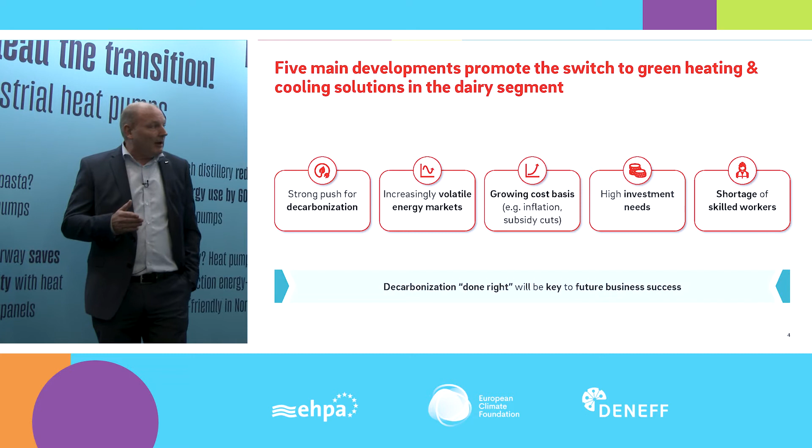These are the 5 main developments we are going to promote. It's a strong push for decarbonization we see in the market. Everyone is asking us, how can we do this, especially under the ongoing threat we see in the current energy price development. We see very volatile energy markets, especially in power generation. Of course, we are phasing out large-scale power plants in the near future in most European countries and we have to renew the power, and how can we solve this?

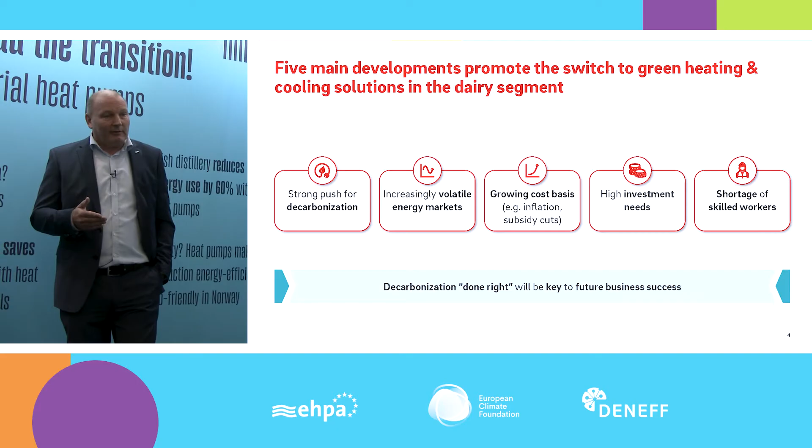We see the high investment needs in these projects as well. And a very, very crucial topic is the shortage of skilled workers we have. We have to implement these projects. And as you see, for instance, we are going to invest more than 43 billion euros in the next 4 years as E.ON Group in grids and projects across Europe.

But we need really good and many skilled workers to realize all these projects, because here we really see a shortage in the markets. So the decarbonization done right will be, of course, for our clients as well as for us, a very big piece of the future business. And therefore, we really need to develop our solutions jointly with our customers.

Next slide, please. We always build together dedicated projects. We do not take any project off the shelf. Every project is unique in our development, and that's the very core of the business we are doing.

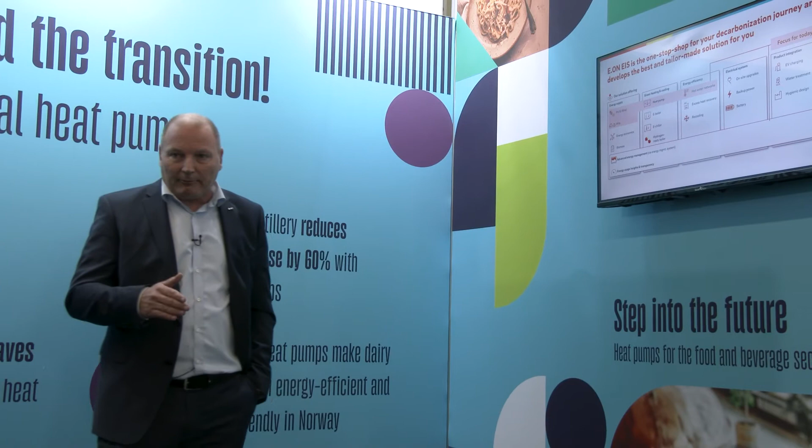So what we are focusing on here is heat pumps, and we will later talk about high temperature heat pumps, because heat pumps as a mass product are not meant here. It's really the industrial design of heat pumps for high temperature processes. And this is, from our perspective, also the key driver in the future we need to tackle.

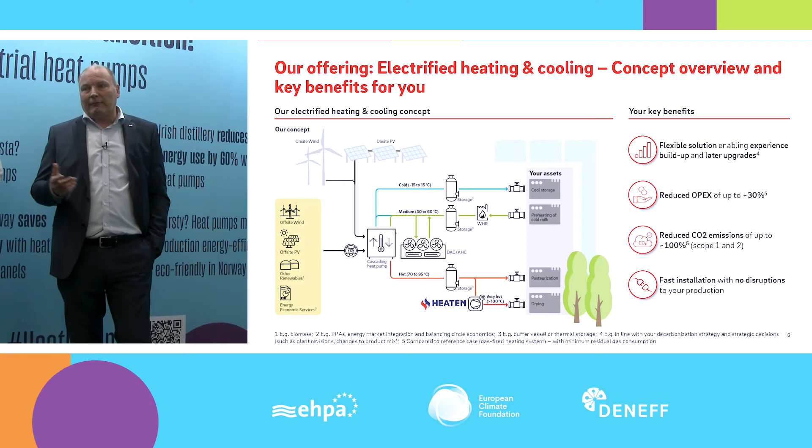So next slide, please. Here I've shown a typical solution of the future we see. So of course we need a large portion of renewable energies in the future. That means either on-site or mostly off-site, we need to generate green power. Green power can come from wind, solar fields, biogas, biomass solutions as well, and other sources in the future like hydrogen. But as long as we do not have a really mature market to replace natural gas by hydrogen, we really need to find other solutions, integrating PV and wind assets into the decarbonization roadmap we see on our client base.

So if you then deliver the power on site, we want to install large-scale heat pumps using waste heat potentials from customer sources on site, from production processes, from cooling processes, for instance, or other environmental heat sources like rivers, and then boost this up in a big heat pump to go to green heat. So we see here a dairy process where we can do this. We can do it for cool storage. We can do preheating of the cold milk, the pasteurization process and the drying process in the future via heat pumps. These are the core elements we are going to identify.

But what is key in all of these projects is really you have to look into the existing infrastructure on the premises of the client and what needs to be optimized there to run the heat pump in the most efficient way. Otherwise, the heat pump does not make sense if the system behind, the secondary system, is not really adapted to the heat pump. So this is a crucial part of the whole project, but there we go with our engineers into the field, look into the details at the client sites, and make a proposal.

And what are the key benefits? You can reduce your OPEX. If you go for such a solution, you are pretty flexible with regard to power and cooling generation, on the same page with heat pumps as well. You can reduce your carbon emissions by 100% with green electricity running a heat pump, and you have a fast installation without big disruptions of the processes on your end. So this is a very high advantage of heat pump systems.

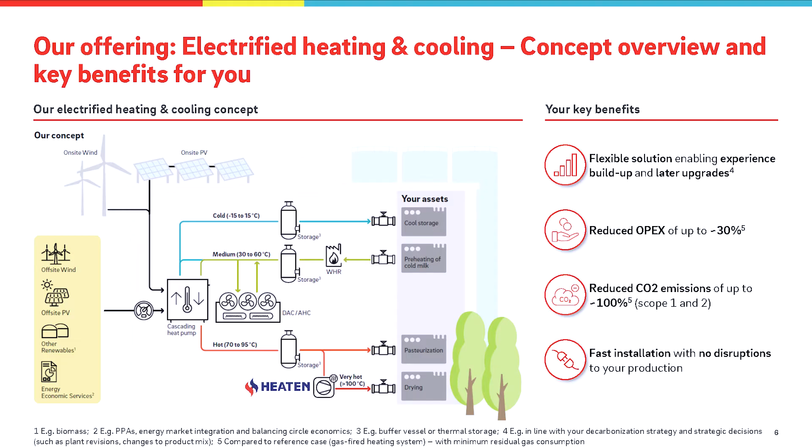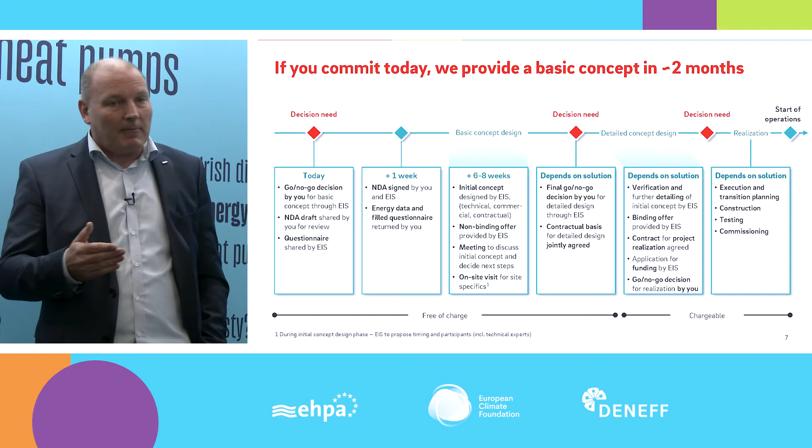Next slide, please. Yes, this is a typical process of how we go into such projects. So first of all, we get in touch with you and make the first presentation of what a solution could look like. If you're interested, we sign an NDA together to exchange some data and information that is needed to run our simulations. What might be the best concept? Within 6 to 8 weeks, we make a first initial concept for such a project, and then we discuss it jointly with our clients, whether this is the right way forward, where it might need to be fine-tuned, and how we can then come to the final project setup.

And afterwards, when the decision is taken, we really go on to the next steps and develop the project until the end, into the contract, into the realization phase, where we take responsibility for the execution and the transition planning, the testing, commissioning, and all stuff like that before we hand it over to our clients.

And this is a typical way forward in our projects. And at the moment, we are running a lot of those projects across Europe. And you are sitting here in one of these buildings where we are also going to install a multi-megawatt heat pump to produce cooling and heating. So this is a very interesting project, and we are also proud of being part of the project as well.

So from our belief, heat pumps are really the core technology for the future to decarbonize the industry. And we are happy to support. And now I would like to hand over to André from Heaten.

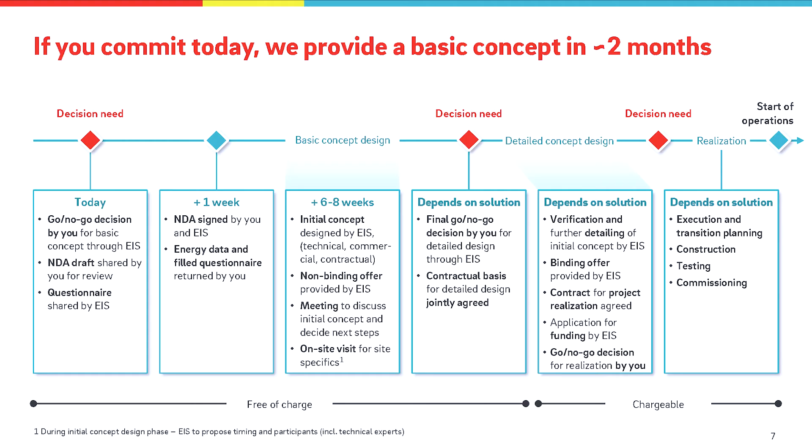Thank you, Christoph, for the nice introduction. My name is André Bechem. I'm the head of sales of Heaten. And now a few words about Heaten. So I think all of you are familiar with E.ON, but I think not everyone has heard about Heaten.

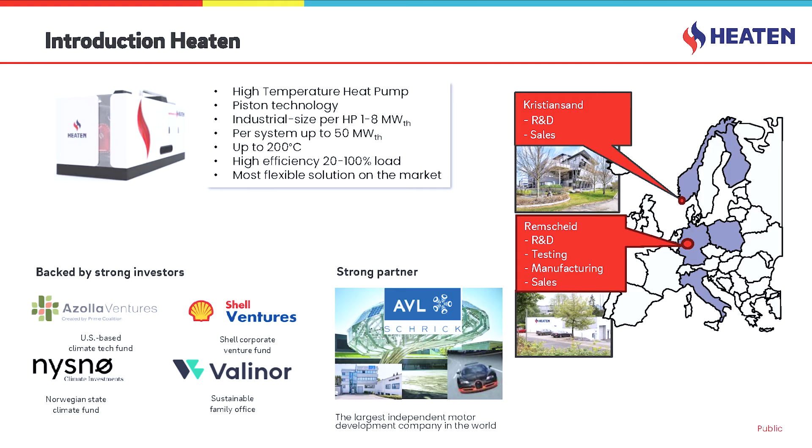Heaten has developed and produces and sells high-temperature heat pumps. It's a piston-based technology, with an industrial size of 1 to 8 megawatt per heat pump. We can reach up to 50 megawatt per system if we install it in parallel or in a cascade. And we can reach temperatures up to 200 degrees. And due to the piston-based technology, we have a very high efficiency over a broad operating range of between 20 and 100% load. And due to this, we are the most flexible solution on the market in this megawatt range.

Currently, we have our head office in Kristiansand in the south of Norway, where we have our R&D and sales. In Remscheid, just 35 minutes from here, we have also our R&D department. We have the test bed and the testing, the manufacturing and the sales.

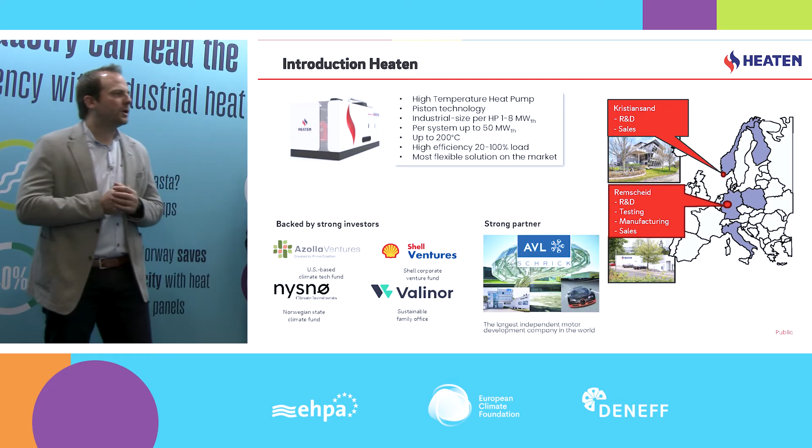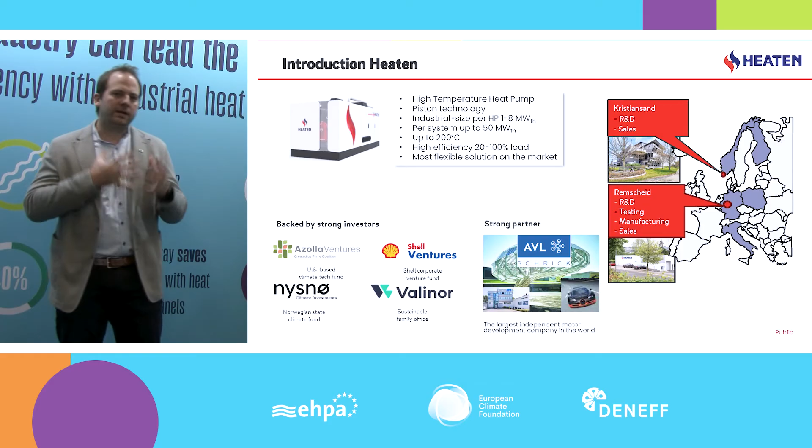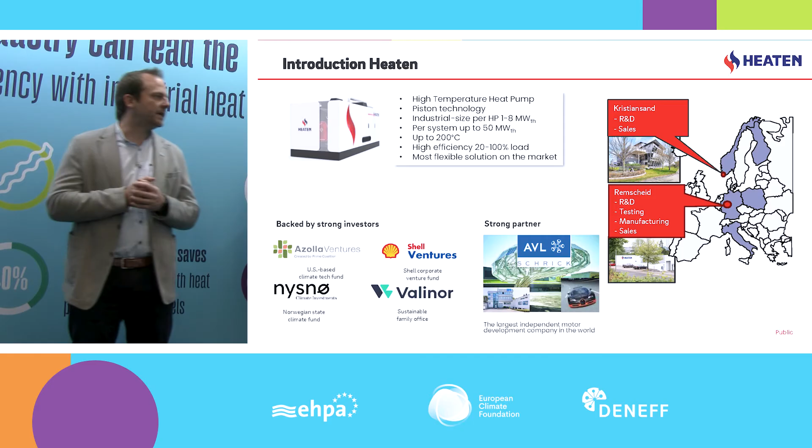We are supported in the development by a very strong partner, AVL. AVL is the largest independent powertrain developer worldwide, and they are the expert when it comes to piston-based engine and compressor development. And we are also backed by very strong investors. We have Azolla Ventures, Shell Ventures, Nysnø, the Norwegian State Climate Fund, and Valinor behind us.

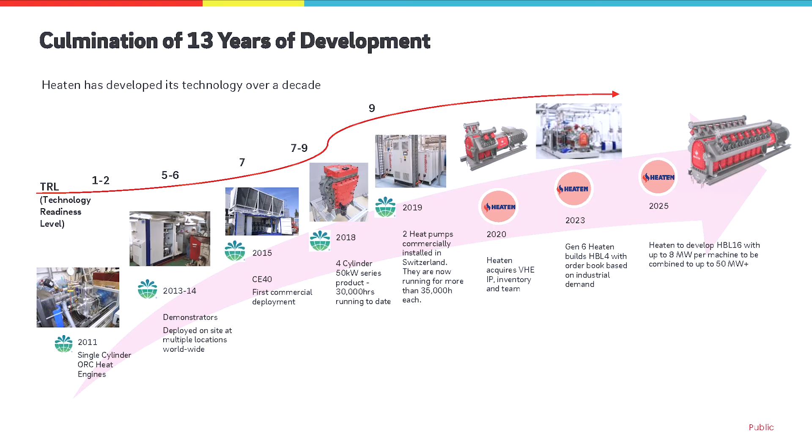Next slide. Looking a little bit to the history, where we are coming from. So everything started in 2011 with an ORC-based system, so converting thermal power into electricity. The key know-how and knowledge about lubrication, the high temperature working fluids and all this stuff was already gained here. And then in 2017, the idea was born to make the process reverse. So in 2018, the first prototypes. In 2019, the first commercially available heat pumps were installed in the field.

However, these machines worked great from the technology point of view, but they can only deliver 200 kilowatt each. And especially from the food industry, we sometimes got the feedback that this was a kitchen machine from the sizing. So now the logical next step was to make it much bigger. So we increased the displacement per cylinder by a factor of 8. And in 2023, we had the first HBL4, so heat booster large series 4-cylinder, on the test bed in Remscheid.

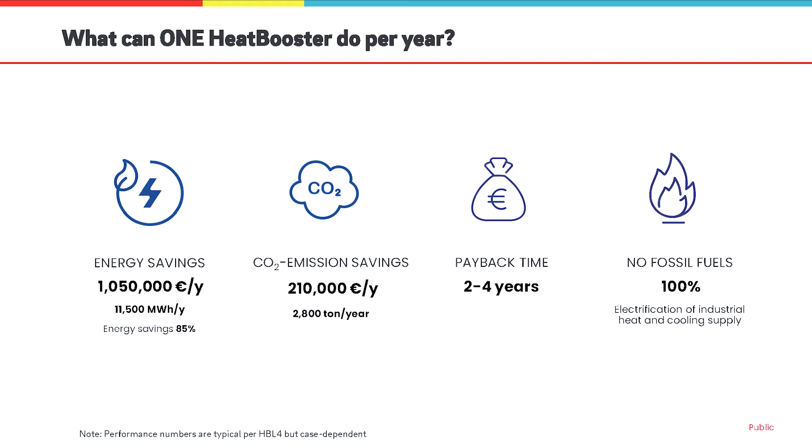Next slide, please. What can one 4-cylinder heat booster do for you? It saves a lot of energy, so up to 1 million euros per year, depending on the case. A lot of CO2 emissions, so up to 2,800 tons per year. We have typical payback times between 2 and 4 years, of course case depending on the country, and you get independent from fossil fuel. And in addition, depending on the case, you can also save a lot of water because you can get rid of the cooling towers.

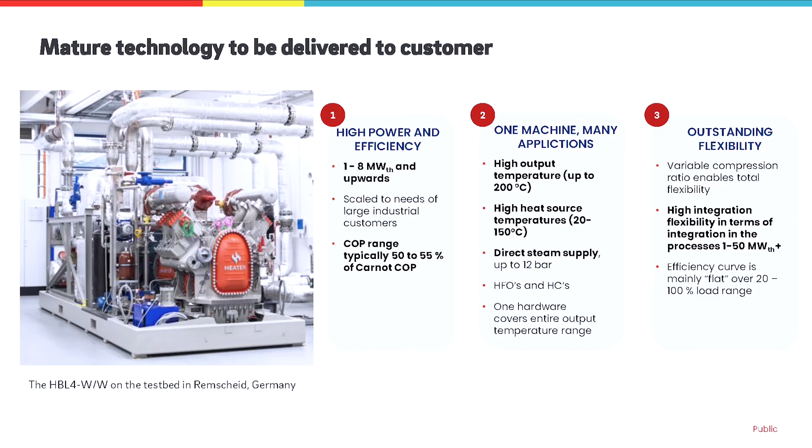And as mentioned in the beginning, we have a variable frequency drive on it, so the efficiency curve is almost flat between 20 and 100% of the load. We have the 4-cylinder. This can make, depending on the temperature lift, up to 2 megawatt. If we install several of them, we can reach 5, 6, 7 megawatt. If it's more than, let's say, 6, 7, 8 megawatt, we would use the V16.

The V16 is basically the same as the V4, but has 4 times the cylinders. And with the V16, we reach a theoretical volume flow of almost 6,000 cubic meters per hour, and that's by far the biggest piston-based machine on the market. If we install several of these HBL16s on a location, we can reach up to 50 megawatt.

And based on our experience, a lot of food requests are in the range between 1.5 and 30 megawatt, and in saturated steam, the majority of requests are typically between 120 and 180 degrees. And the important thing to mention here is that you can do a pilot, a proof of concept, proof of technology with 1 megawatt, and then later on you can scale it up to 20,

30 megawatts. So you are also flexible in how you integrate the machine, because in our experience, a lot of especially food customers' factories are historically driven, so space is always an issue. Also how to bring in new technology, and we can do it step by step.

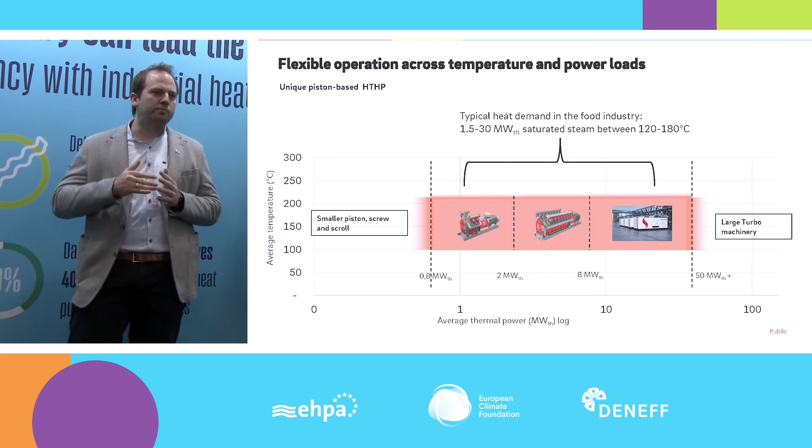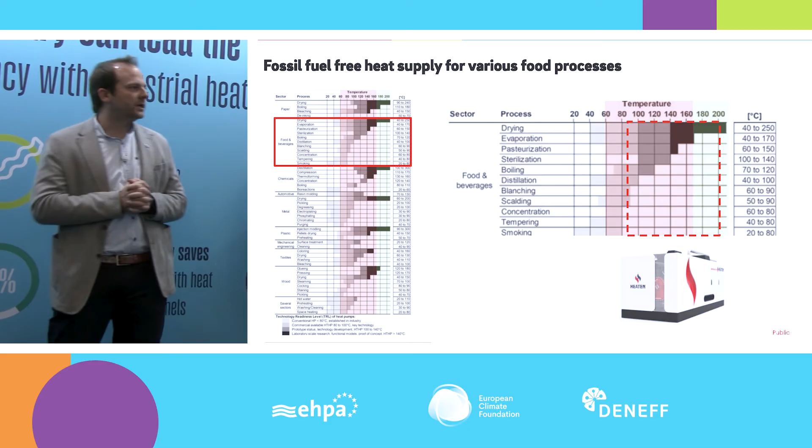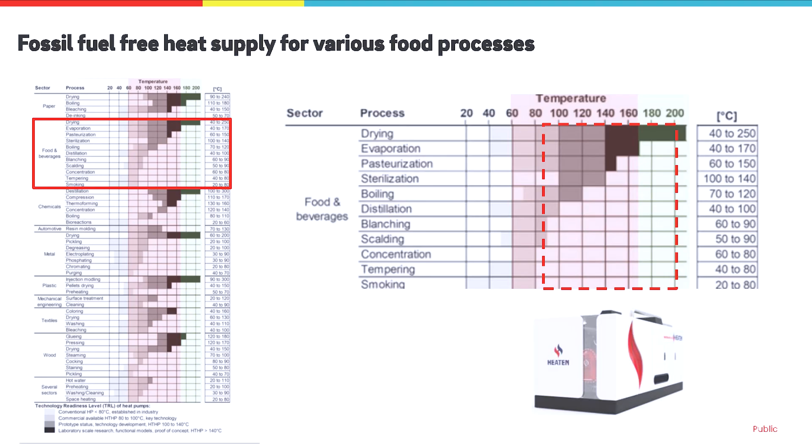Here you can see typical processes we are hunting for in the food industry. So all types of drying processes, evaporation, pasteurization, sterilization, you name it. So all these typical processes. Our focus market is on temperatures above 90 degrees because that's a high temperature heat pump. And between 90 and 200 degrees, that's our core market.

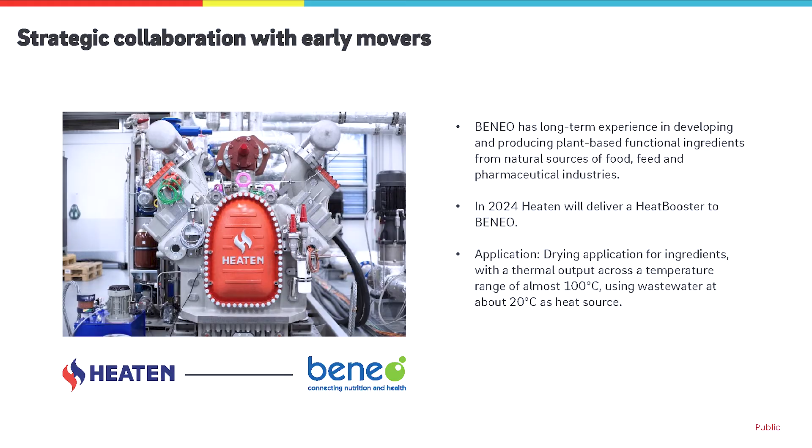And then I'm also very happy and proud to announce, we had the press release out on Monday, that we also have a strategic collaboration with Beneo. Beneo has long-term experience in developing and producing plant-based functional ingredients. This application seems at first look not that exciting because it's only almost 100 degrees. However, the heat source is quite low with 20 degrees, and we can do this in a one-stage configuration and still ensure more than a megawatt thermal of output.

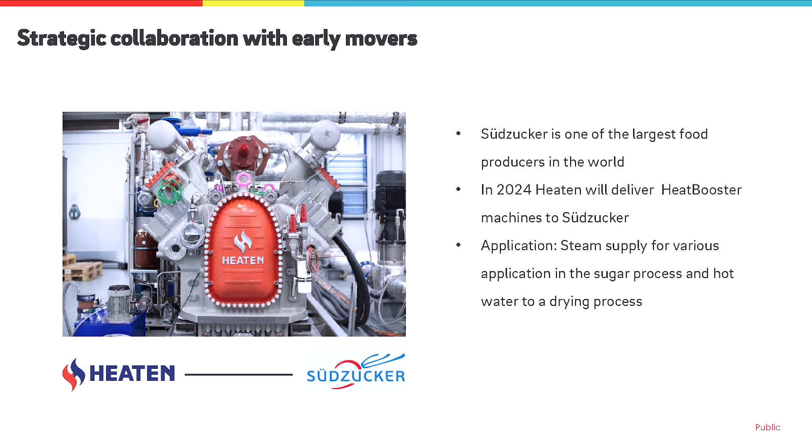Next one. And here, as already announced last year, we are very happy that we have Südzucker as our strategic collaboration partner. Südzucker is one of the largest food-producing companies in the world. We will deliver in 2024 several machines to the sugar processes of Südzucker, and the application is that we produce low-pressure steam for them.

And therefore, we work together with E.ON, and I'm very happy that we have this strategic collaboration with E.ON, so that together we approach the customers and follow up on several projects, because customers normally want a turnkey solution. We are a startup which does not have the resources to do the complete optimization of the heat supply and everything. And E.ON, of course, has the capacities to optimize the heat supply and develop customized, fully integrated solutions. And we deliver more or less just the technology.

I think the technology is also very interesting for E.ON because you can cover the whole range of megawatts and temperature, and you always use the same technology base. And together with E.ON, we can also do heat as a service, so that you do not own the asset at the end of the day. E.ON can operate it for you, and the integration and all the rest can also be handled by E.ON. And therefore, that's a very fruitful cooperation, and I'm very happy about it.